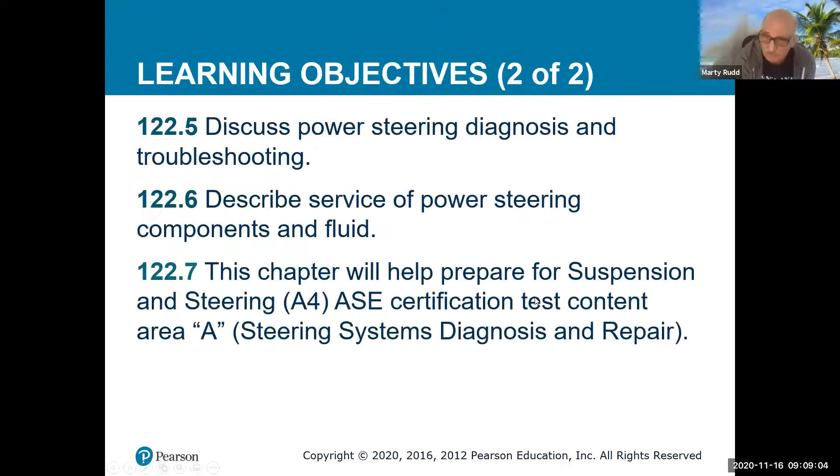But hydraulic, or sometimes they call it power assist steering, is a system that came out to assist with the operation of the steering. One of the things that we look at, and this is just a little bit of science here, is Pascal's law. And Pascal's law also applies to any kind of hydraulics. So if I take a container with a fluid inside it and I put pressure on it, it's going to put pressure out equal in all directions. We use this principle to help with assisting the steering.

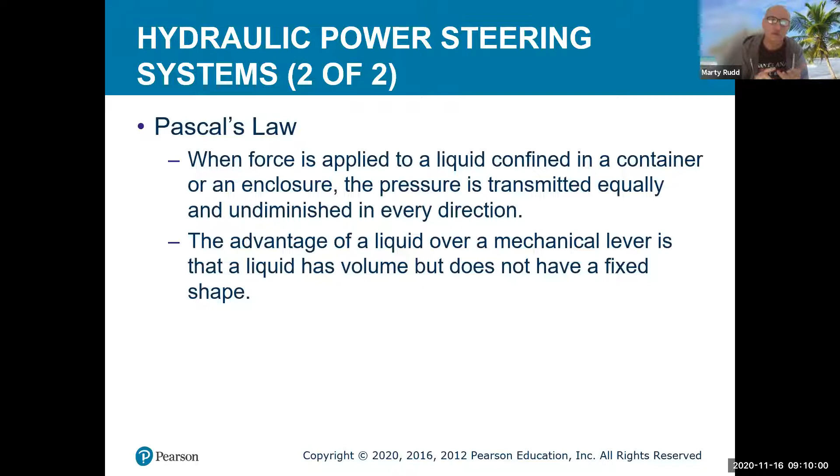When you get into power steering and steering suspension, you're going to talk more about this. But Pascal's law applies not just to steering, but also to your brakes, and any kind of hydraulic systems like lift gates. And this is showing how that works too. I have my fluid in here, I'm putting a little pressure on here, and it exerts that pressure out this way, through a little tube here. So I have 10 pounds of pressure going in, and I got 10 pounds of pressure going out. Even your floor jacks use the same principle.

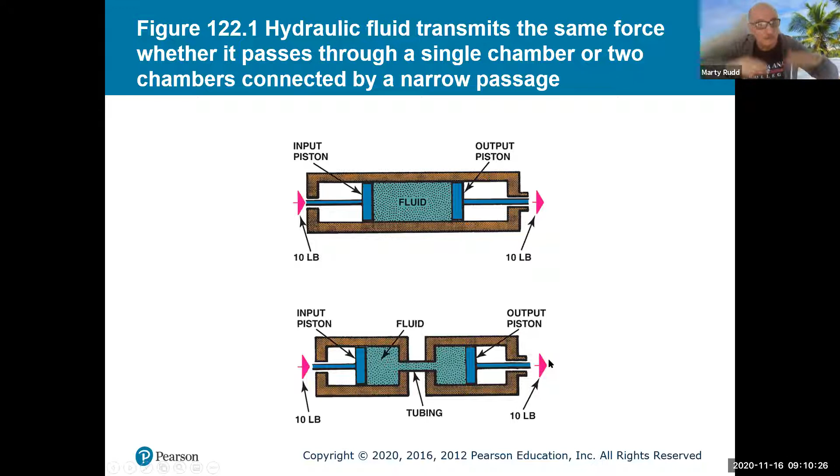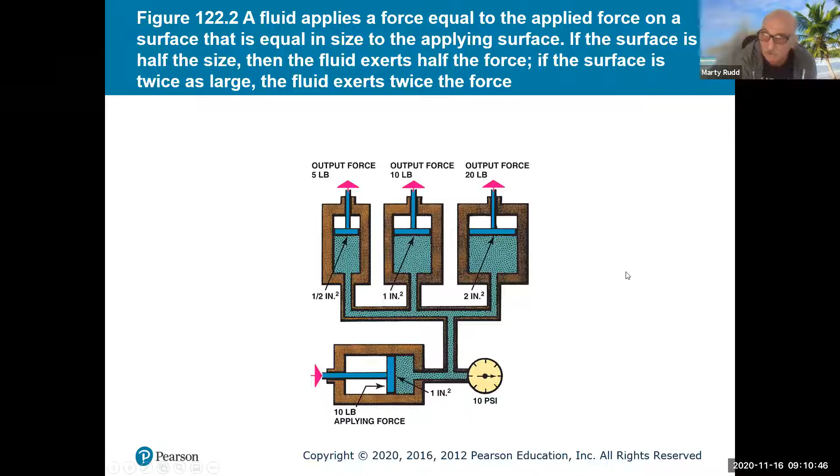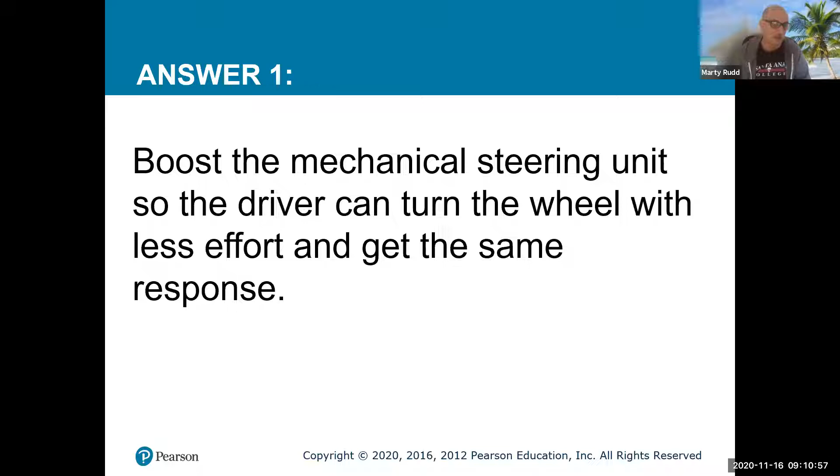Here's another way of thinking about it too. I have different size cylinders, and this causes more output. So I can take 10 pounds and cut it in half here and make it 5 pound output, 10 pound output, 20 output. What is the purpose of power steering? It's actually to help the driver turn the wheel with less effort and get the same response.

In the parts, there's going to be a power steering pump that applies that pressure, and there's going to be a reservoir, and it's important that you check that reservoir. Power steering fluid, for whatever reason people think it never wears out; it does. It breaks down after a period of time, and it should be changed on a regular basis. Go by what the manufacturer says. That reservoir is just like your radiator reservoir. It's a reserved spot for the fluid. So when it goes to work, you can see that fluid go down and up.

And if you take the cap off, be very careful; it might splash over. You'll actually see it circulating a little bit too. The reservoir can be right on top of the pump, or there can be a remote reservoir someplace else, because a lot of times it has to do with space.

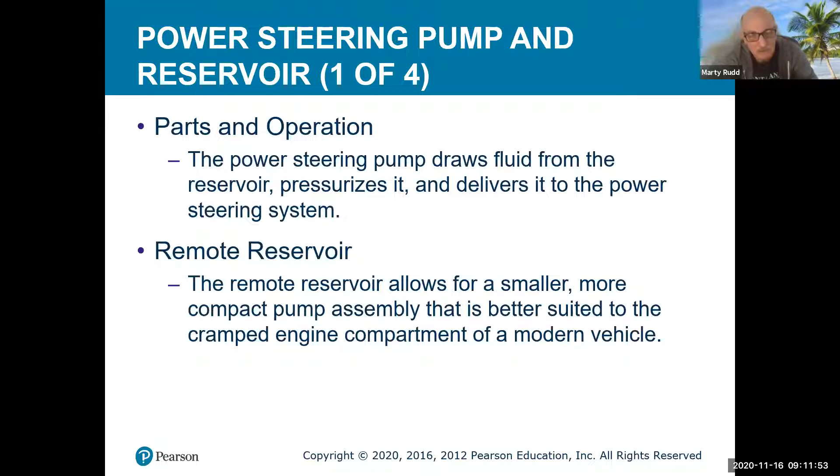Okay, and it forces and pressurizes. Pressure is involved, and it's a lot of pressure, folks. So be very careful. We can actually have forces of 450 psi when you're going into the parking, where it gets to the maximum. So you're at a dead stop and you're kind of parking it, it can actually be up to 1400 psi. So that can be very concerning.

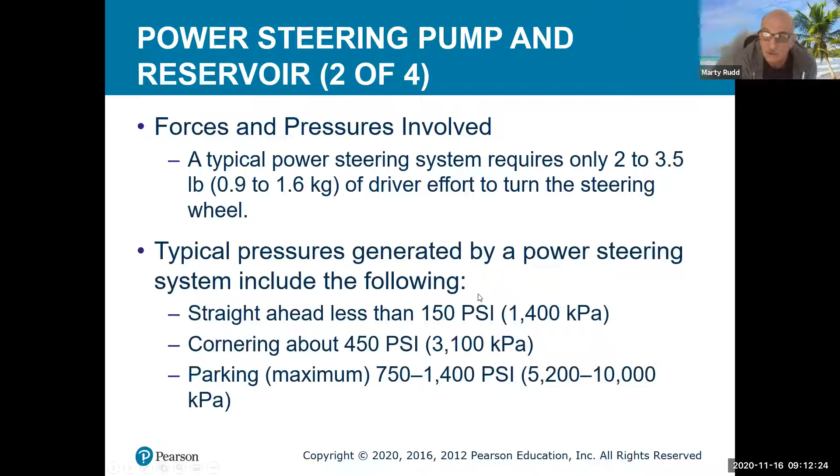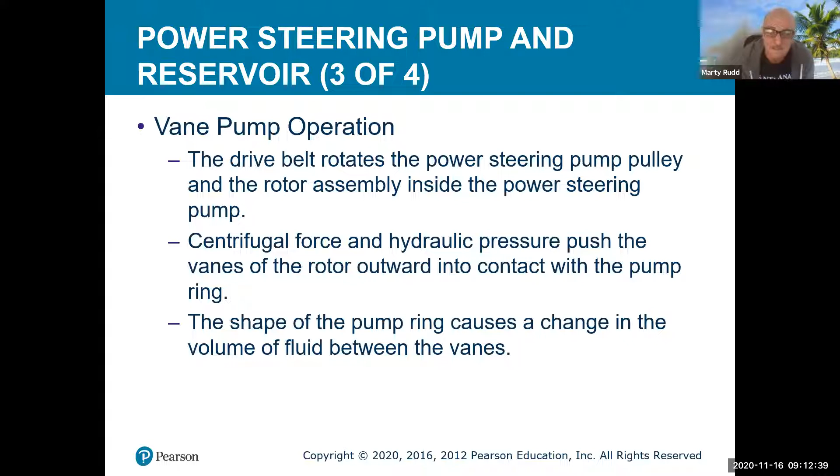There's different types of pumps. I won't go into all of the different ones, but there's vane type that actually uses centrifugal force to force that fluid around and pressurize it up. There is an actual control valve in that modulates the actual pressure, bleeds off some of it. You don't want too much pressure, or else it can actually start blowing things out, seals, and blow hoses off too.

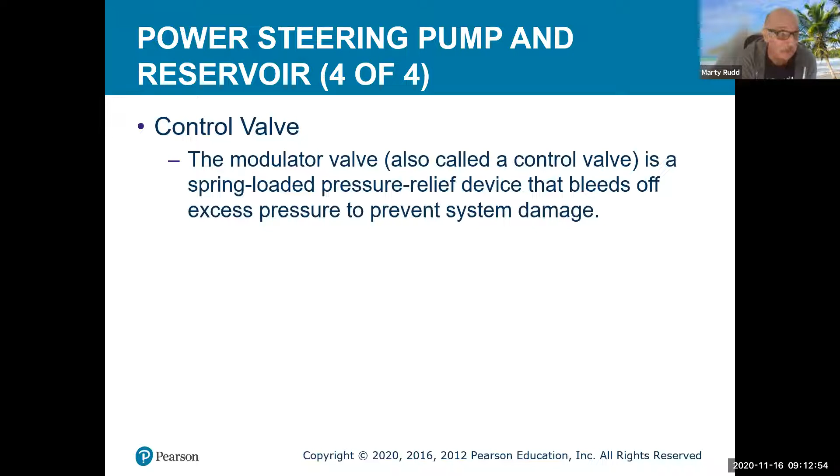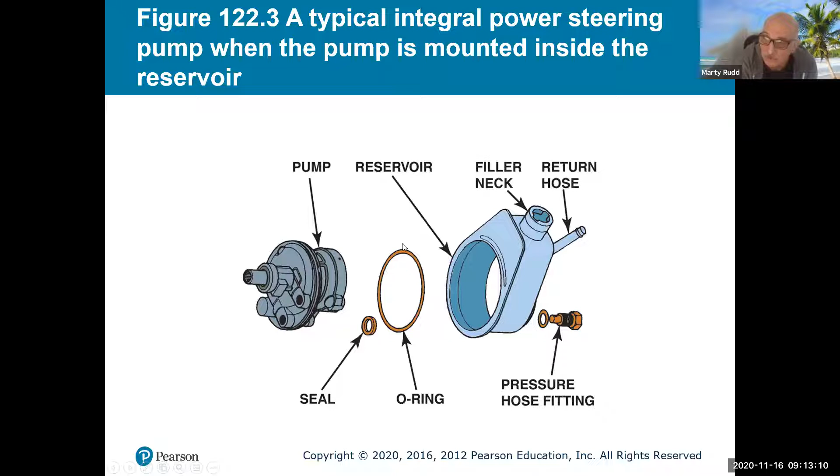This is what a pump, this is one with a reservoir already on top. This is one style. It actually has the pressure hose coming out the backside here. Here's a return hose here. This O-ring seals this actual pump in place. And this is one of the kind of descriptions right here.

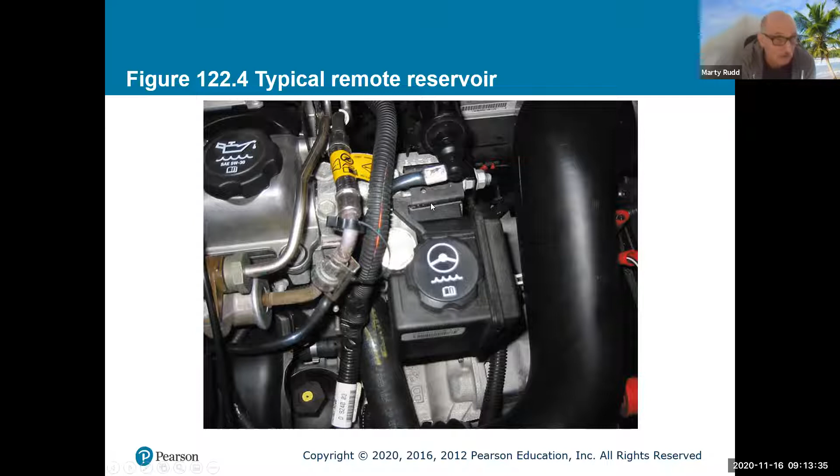And like I said, there's different ones. You may have a cap on top of the pump, or you might have a remote reservoir like this one here. It's not on top of it, and it's primarily because of space. And all it does is actually fill and have the spot for that fluid to be at. So here are some different types of pumps. You can actually see that this one has no reservoir. This has a reservoir in it, and this has a reservoir in it too.

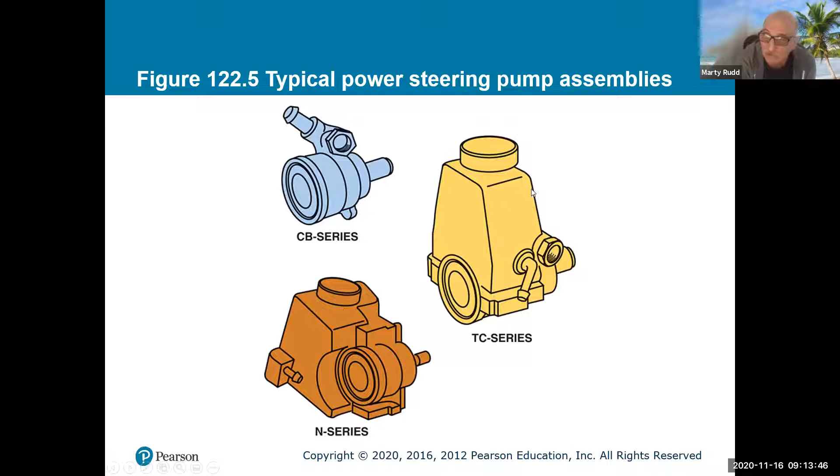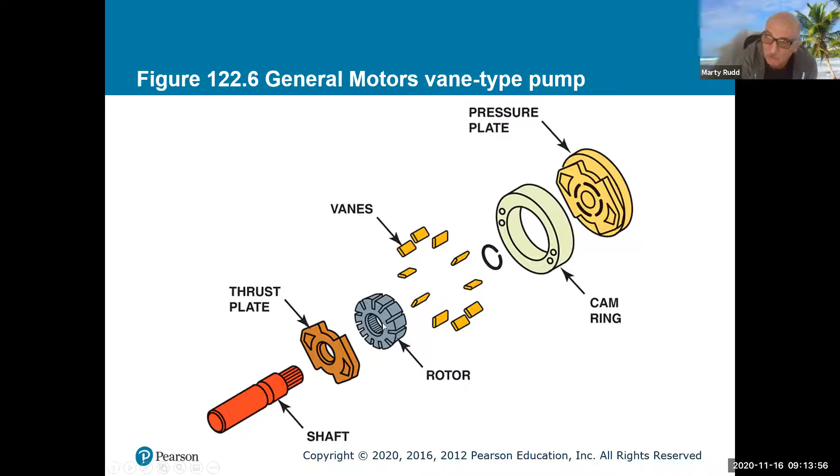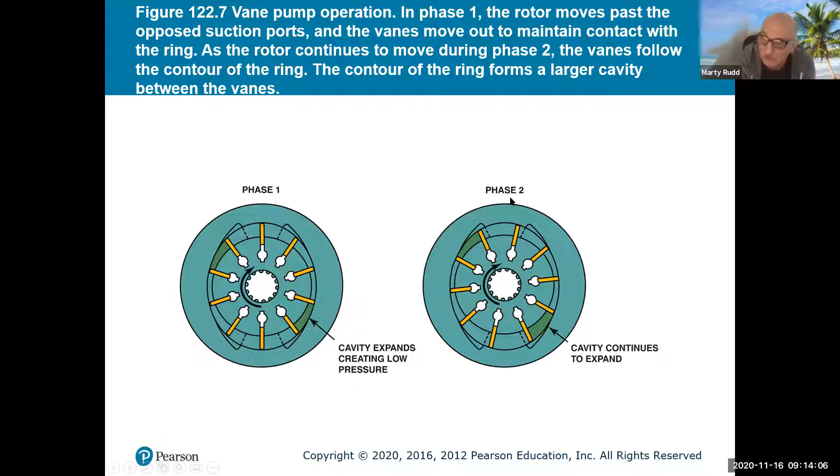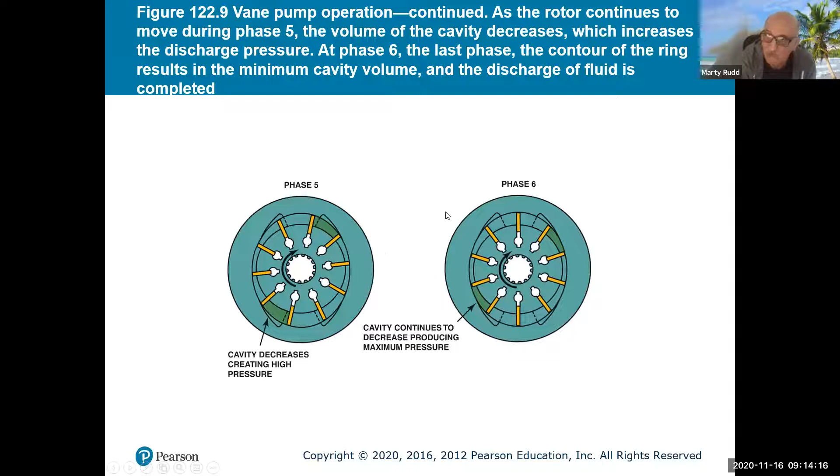And like I said, there's different types of setups. This is a vane type pump here. You can see all the vanes. It goes inside this rotor assembly, and it kind of pressurizes around. And you can actually see that in action here. So here's how it phases in. And as it goes around, it's going to give a little bit of pressure. And again, he's showing a little bit more of that. And then kind of following it out, it actually shows you how it spins around.

Here's that little flow control valve to make sure it doesn't over pressurize. And if you do have one over, usually what happens first, it starts weeping through the seals, and after that it starts blowing the hoses apart. Usually those hoses are very high pressure hoses. You're not going to use a fuel line or anything like that. You're going to use a high pressure hose for that, because it could blow itself apart.

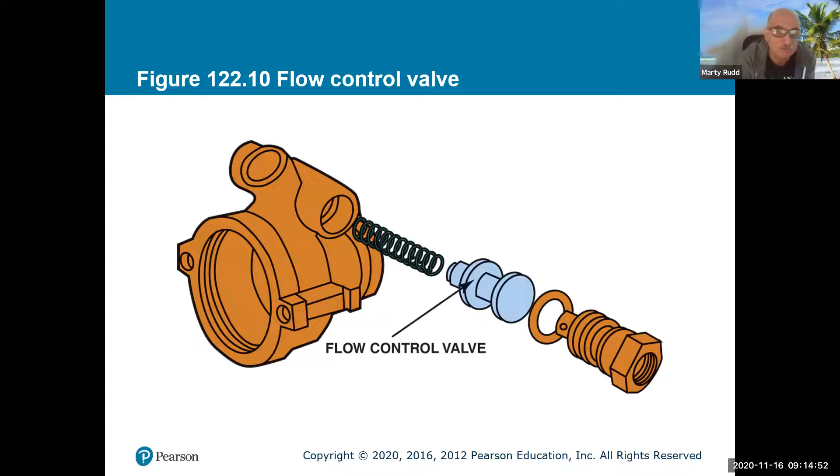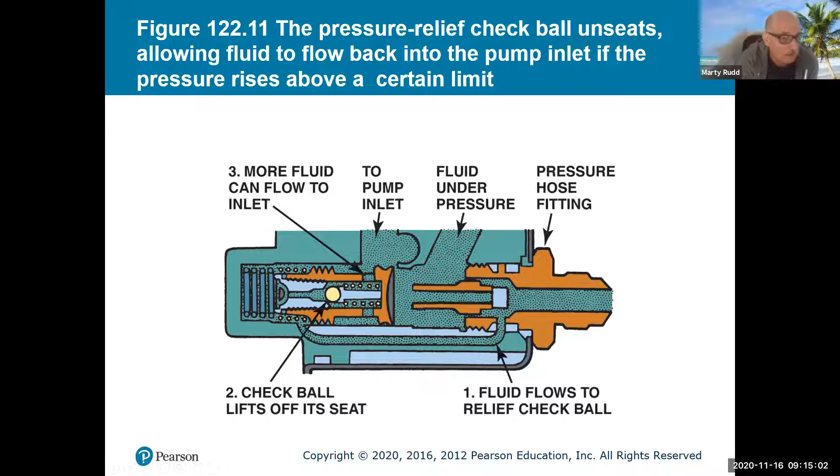But this is what's going to kind of control that pressure. And here's what it looks like inside. After a certain amount of pressure, it allows it to actually bleed off, so it won't allow it to overpressure. And it says, how does the vane type power steering pump operate? And it's centrifugal force.

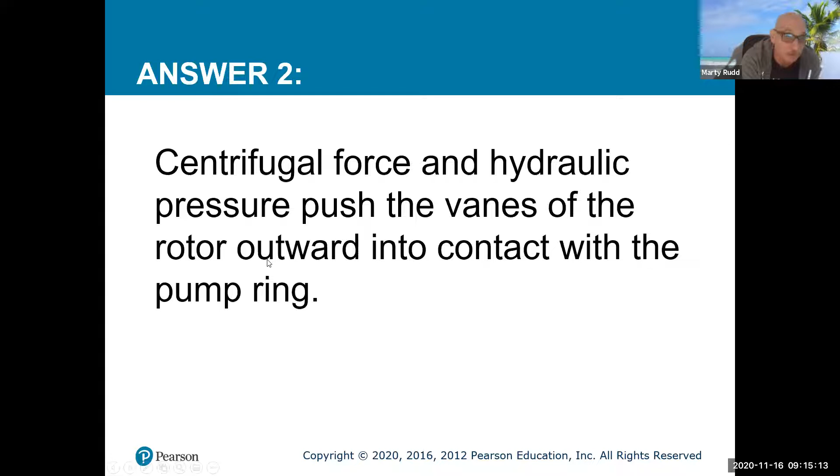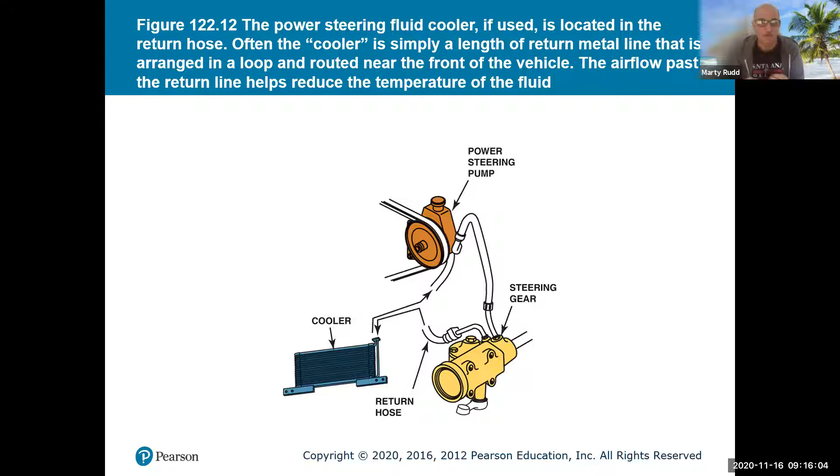And then, because the power steering fluid will get very hot, some of the vehicles actually have a cooler attached to it to cool it down, because if you get the fluid too hot, it has possibilities of the fluid breaking down the properties inside the fluid.

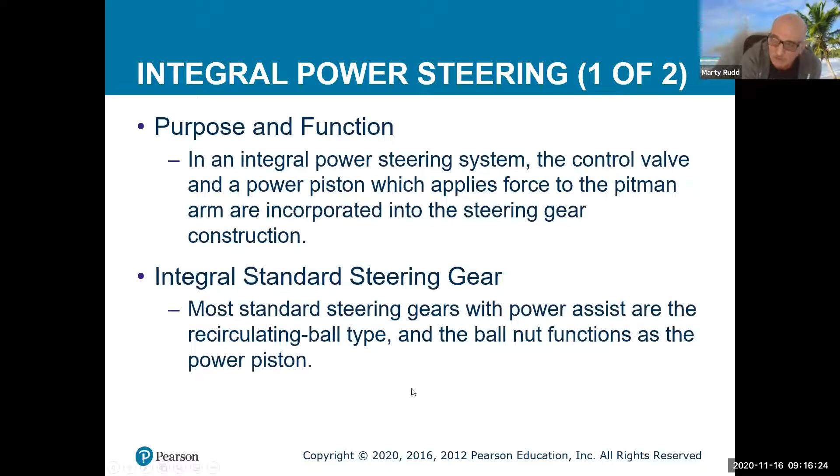So the integral power steering system, the control valve and the power piston, which applies force to the pitman arm, are actually incorporated into the steering gear itself. So there's the integral type, and then there's a rotary control valve inside. So let's look inside here.

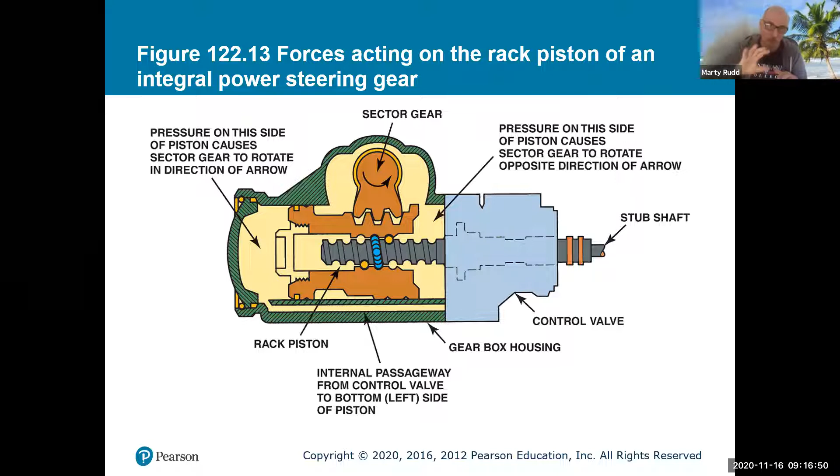So here we're actually looking at a box like we've seen before. And it allows to help force that back and forth. Force is probably a bad word, but it allows it to actually give assist when you're going back and forth. And here's actually the rotary type setup here. And here we got to look over the top here.

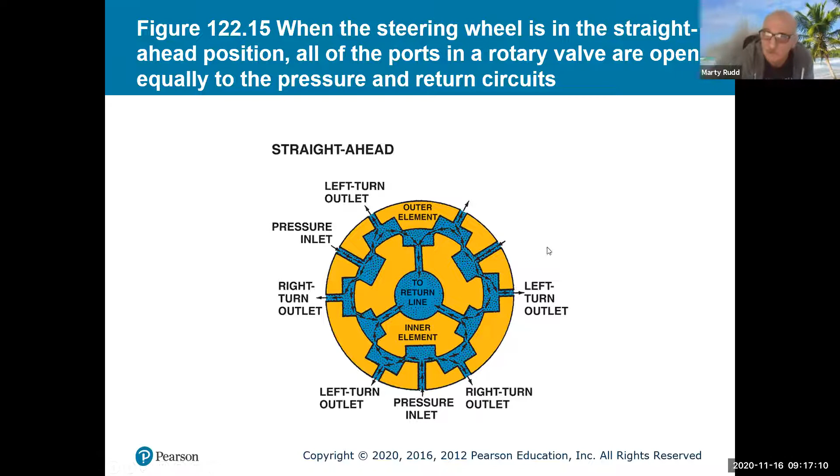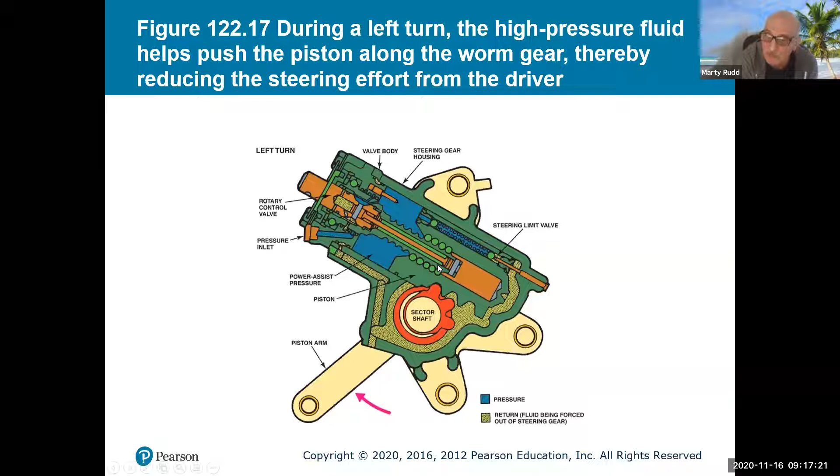And this is helping with getting the straight ahead position going also. Again, you'll talk a lot more about this when you get into your steering class. This is kind of an overview of what this is all about. Here is another picture of it right here. And here is showing some more center action of it.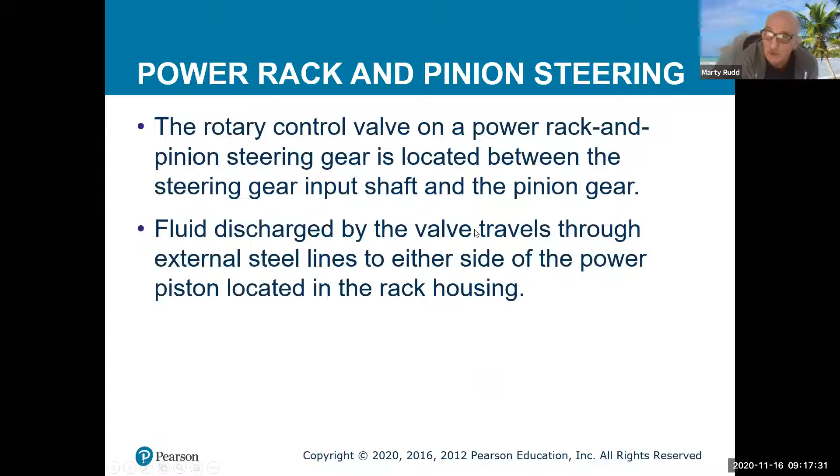Rack and pinion, again, there are manual rack and pinions out there now. We're primarily electric, which we'll be getting into next. But you can see how this control actually allows to assist in that rack going back and forth. So when you start turning this way, it's going to open a valve to help assist that motion. You turn it the opposite direction, it's going to help assist that motion too.

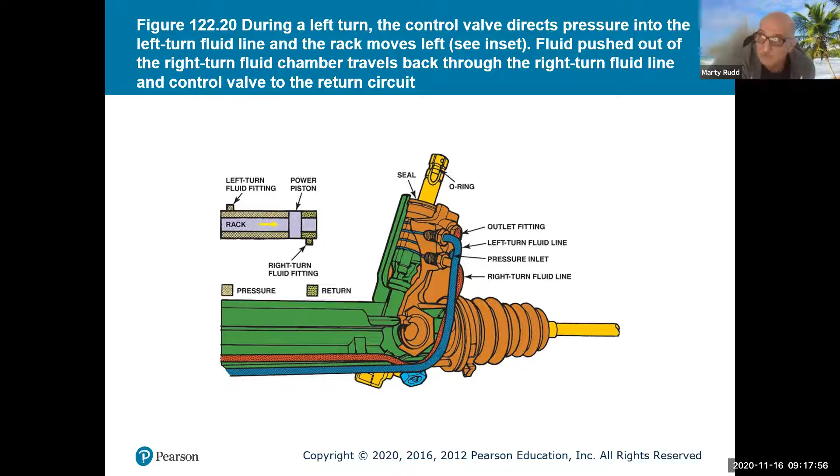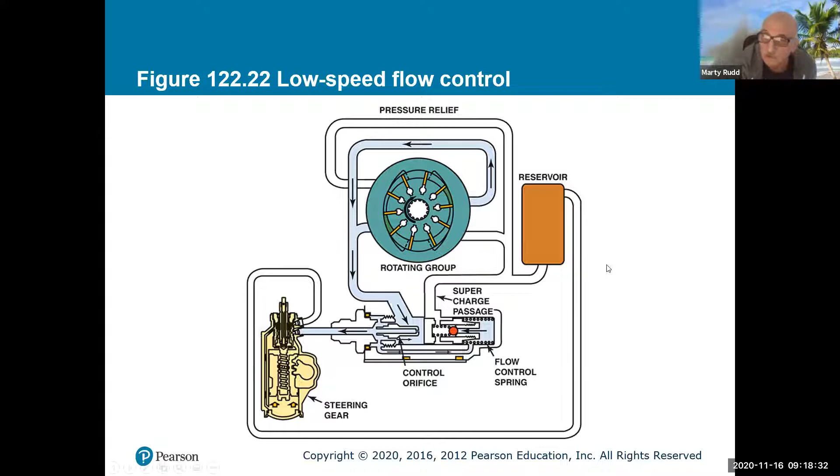There's a control valve. Here's that control valve to actually assist. This is showing more of a steering gear type system, and actually inside that valving assembly. So when you're at low speeds, you're going to have a little bit more turning ability. When you're at high speeds, you don't want that quick a response, or else you're going to be really changing lanes real quick. So you want to have kind of a flow restriction, you might say. And this is kind of showing some of that.

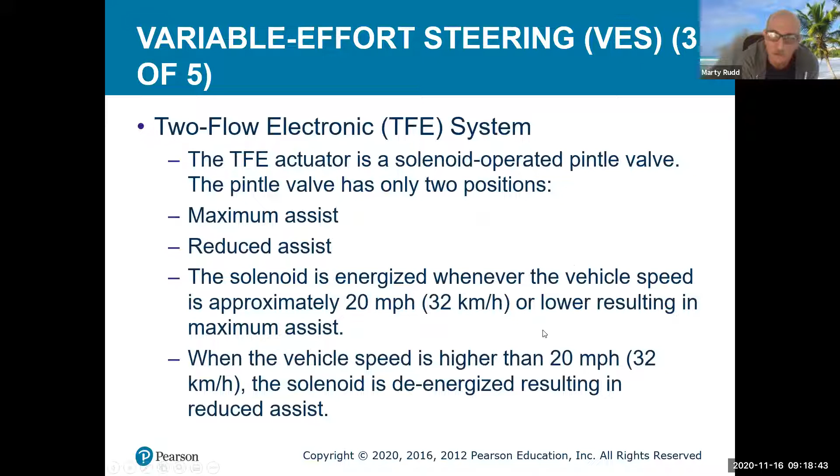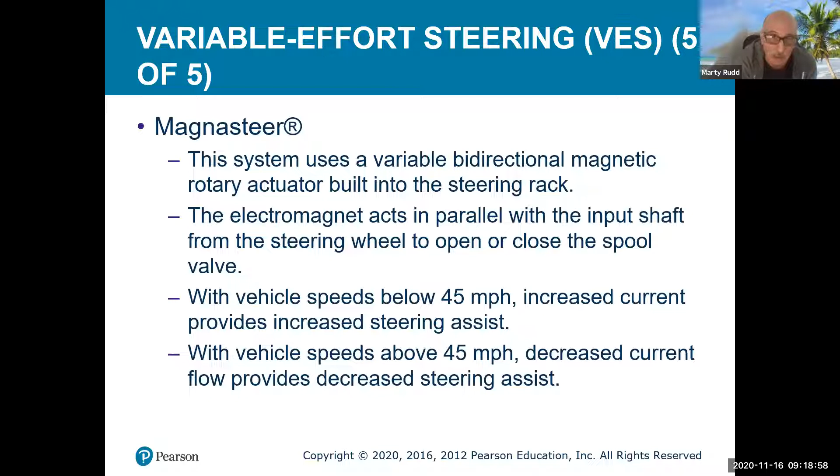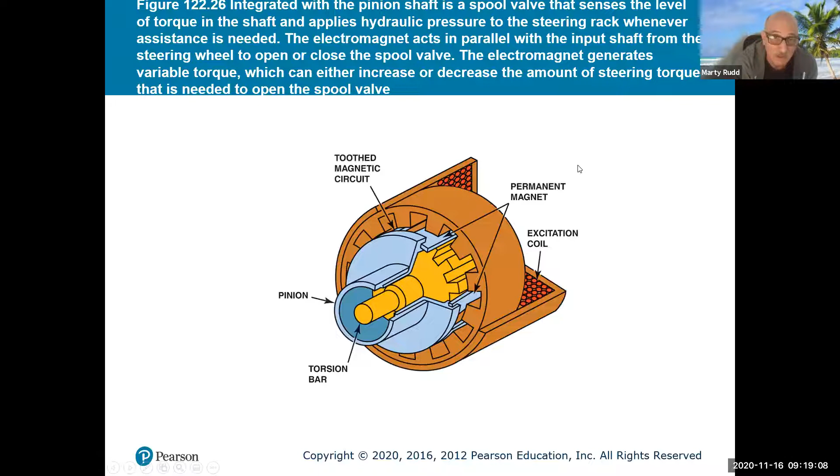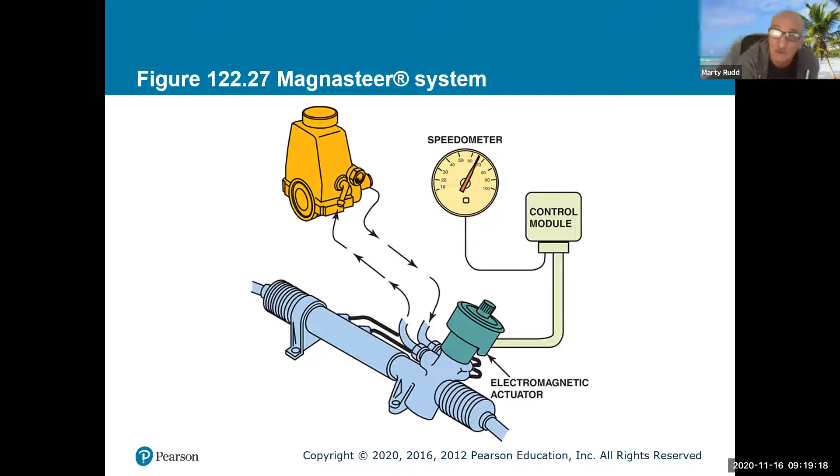And then in variable effort steering, same thing. It's all speed sensitive in the steering. And then there's Magnasteer, this system uses a variable bidirectional magnetic rotary actuator built into the steering rack. So it uses a different type of winding, so we're getting more into the electric steer type. Again, we'll get more into this as we go along, but this is actually a combination of two. Actually allows the fluid to go at different speeds.

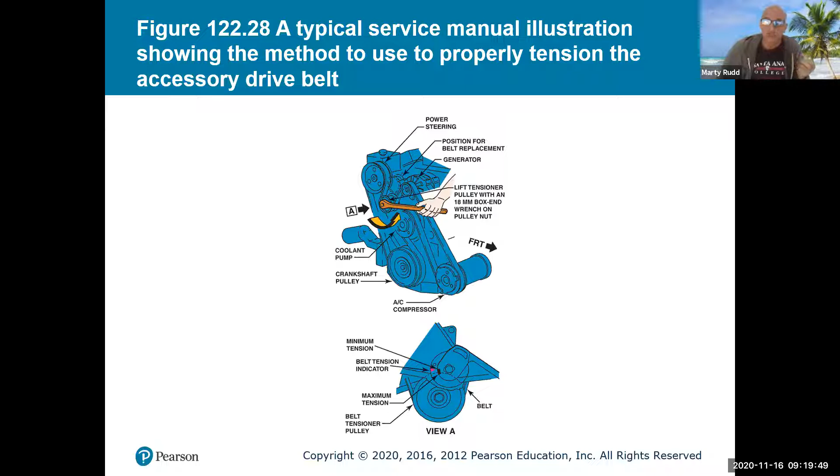Without getting too deep into it, one of the important parts is if it is a hydraulic system and it has a belt drive, you want to make sure the belts are tight and in good shape, because that's going to affect your steering. If it is an electric hydraulic pump, then there's a different thing. You want to make sure you have power to the pump. There's a whole diagnostic routine on how to do that too.

So this is power steering, and I'm going to go ahead and stop here, because I'm just going to get more and more deep and technical on it now. I will post this so you can feel free to look at it. And also, feel free to look at the Zoom presentation on this too.